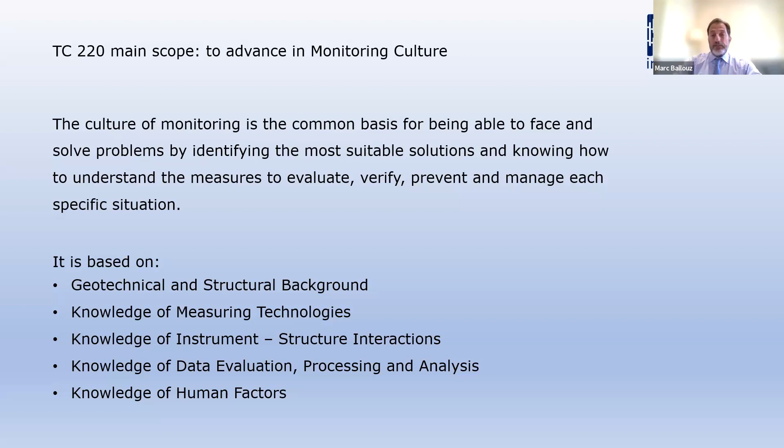That's the topic of our talk today. So let's see what monitoring is. This is a definition I found some years ago, and I think it's correct: it is the repeated observation in time of a process or phenomenon through the measurement of one or more indicators and the collection of information. What's important here is that they use the words observation, measurement, indicators, and information—not instrument and numbers and values. But I would like to propose something more: monitoring is the art of understanding the behavior of natural phenomena or man-made structures, and we'll see why I'm calling it an art.

What is the mission of monitoring? This is a definition I found and like very much, because it says the mission is to provide as much information as possible, in the simplest and most complete form, to be used by those who have to make decisions. This is the real scope, the real mission of monitoring—to support those who have to make decisions. This is clearly stated in the observational method, which is based on measurement and monitoring. But too many times we forget this, and we just provide instruments, numbers, and values, not information.

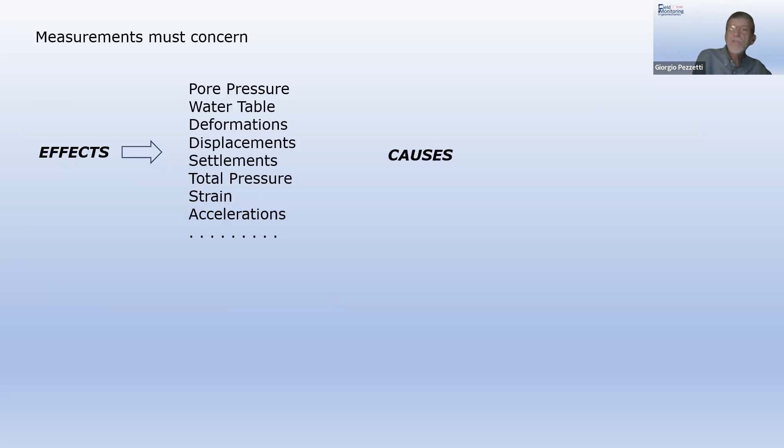What can measurement concern? Of course, the effect—what we are looking for. Some examples: pore pressure, water table, deformation, displacement, settlement, total pressure, strain, acceleration, whatever we want. We have enough instruments nowadays to measure almost all the parameters we need. But that's not enough—we have to go more in detail. I think it's necessary, even mandatory, to measure the causes that have produced the effect we are measuring. Otherwise, we lose part of the information. So we have to at least know or measure the loads, the pressure, the level, the flow, rain, wind—whatever has a consequence on the effect we are measuring.

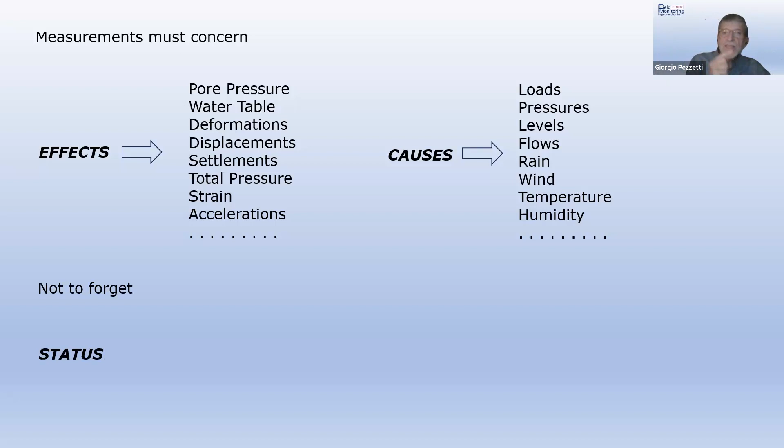But if we consider the definition of measurement, of course, we have not to forget to know the status of the system. Status means the working program, the progress of the work, which level had been reached during the construction, for example, which boundary condition: a cold season, a hot season, raining season, whatever it is. Correlated activities. Are they excavating? Are they building? Are they vibrating?

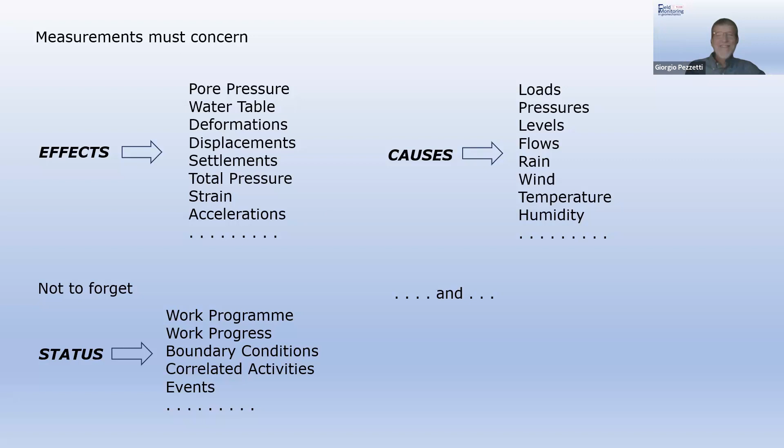I encourage everyone watching us to take a picture of this slide because it will save you from many problems. And of course, the observation is not enough to measure something by instrument, but we have also to visually observe what is happening. So we need to perform visual inspection, manual check, test, collect samples, making laboratory tests, everything that can be useful in order to complete the information that we are providing.

Giorgio, something. Tell me. Could you allow me to interrupt you for a minute?

Of course. Just to give an example of a construction site in Manhattan, New York, where during the excavation they had done the piles all around, secant piles, to do shoring for an excavation. And as soon as they started, the building next door started tilting. So because they had a good monitoring system, monitoring all the structure and infrastructure around, they detected this movement.

And they also had field reports, like what was happening, or as you have here, work program. And the client asked, what's happening? Why is the building tilting? And all the teams at the site, like geotechnical engineers, structural engineers, the contractors, started pointing fingers at each other. And nobody put together the work progress with the displacement measurements.

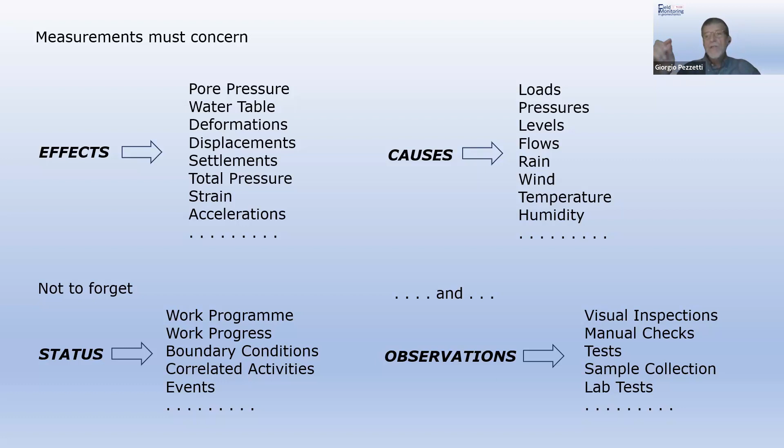That's experience, important. And it reminds me another point I will not touch in this presentation, that field monitoring is a teamwork. It's communication. The instrument expert is not enough. The engineer or the designer is not enough. But if they put together, they sit together around the table, they discuss the matter, a solution can be found. Yes. Okay.

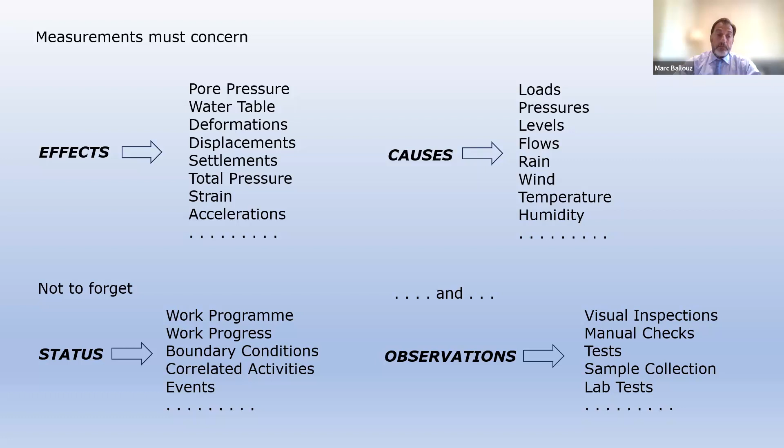Which are the basic rules of monitoring? Let me say that until a few years ago, there were no rules. In geotechnical activity, maybe geotechnical testing, site testing, or lab tests, we have a lot of standards, a lot of indications. We know exactly what to do, which instrument must be used, and how to interpret data. For monitoring, there were no rules. We started, I say we because I am part of the ISO group who is drafting this standard. In 2010, we started drafting this international standard regarding monitoring.

And this is part one, which is the general rules. And here you can find a lot of interesting suggestions. But look, since this is a standard, it's not just a suggestion. It's not something that you have to use, you have to apply. But anyway, let's consider it as a reference mainly. For example, regarding the instrumentation, they say that the key points in the monitoring program are the ones I've reported here: robustness, influencing factors, redundancy, stability, and function check and calibration.

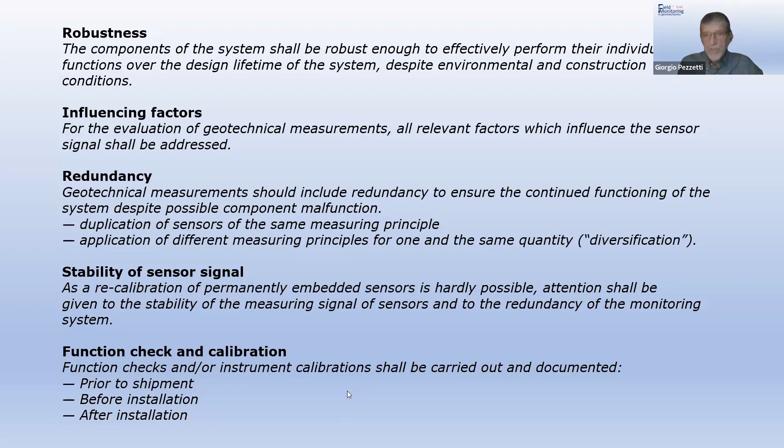First, this one. And I would add another point, very important, which is the conformance of an instrument. Conformance of the instrument means that an instrument, when installed, must not change the conditions. Otherwise, we don't know what we measure.

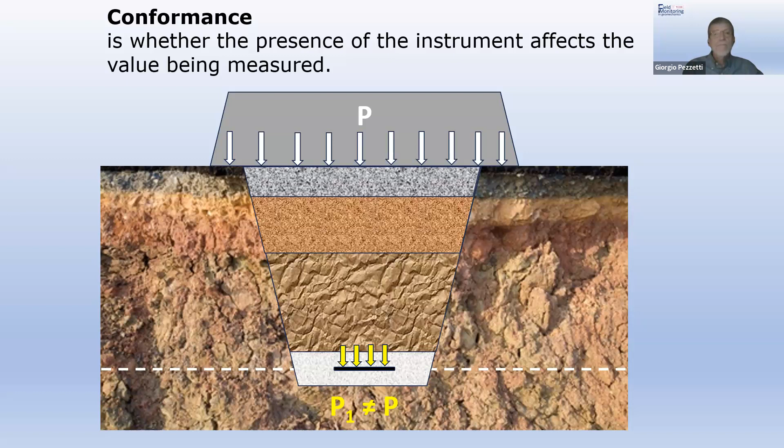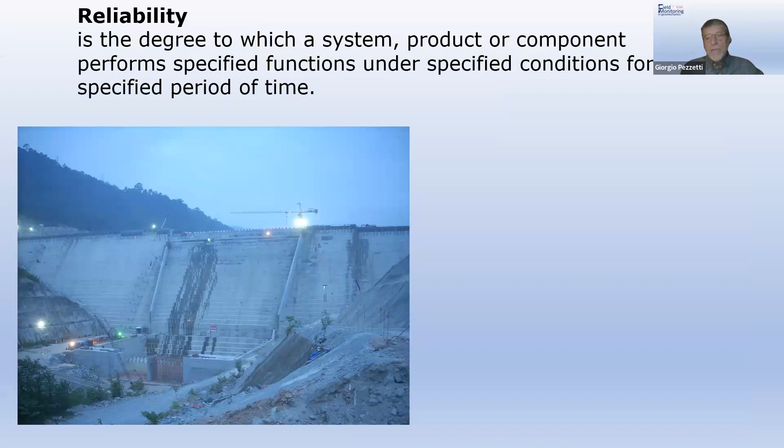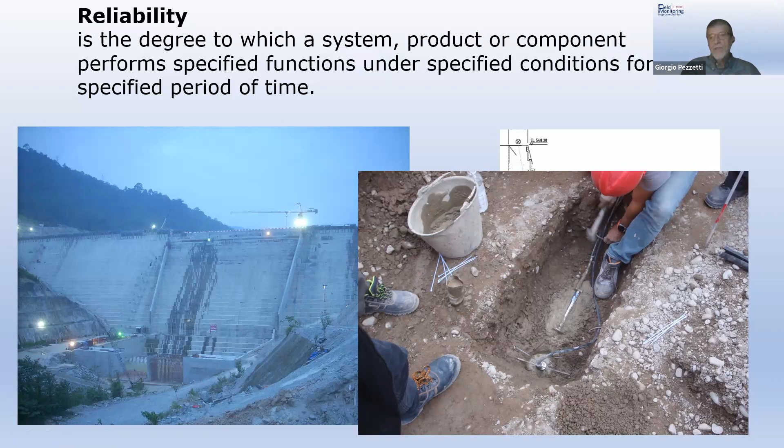And another one is the reliability. That means that the instrument has to work properly for the time that we expect, facing the conditions that are expected. For example, in a dam, if we have to measure something here at the bottom, and we install an instrument here in the foundation, what is important is that it is reliable. It survives the conditions for the lifetime of the dam, for example, which is 20, 40, 60, 100 years, without major change in its properties. So reliability and conformance.

But, and here I'm sure Marc will appreciate what I'm saying, there is another golden rule, which does not come from me, but from Ralph Peck. And he said that successful practice of engineering requires a high degree of engineering judgment. So we need, again, engineering judgment. We have rules, we have standards, we have references, but the main point is the engineering judgment. We have to know what we want to measure. We have to know the basic problem, the basic constraint.

And we have to understand that we are measuring maybe in a small point, but the structure or the area is so large that we have to consider even a broader range. So Peck says that we have to know what is happening in the narrowest technical details and the broadest concept planning, in order to be sure that each step is sound.

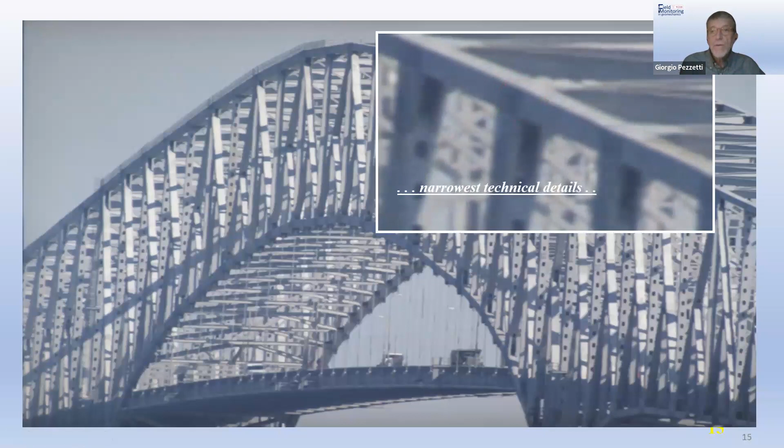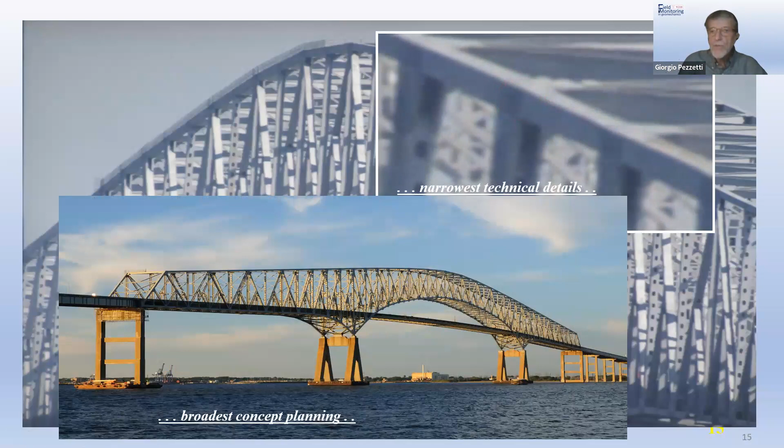A small example, if we have a bridge like this, and we have to monitor, we can monitor a single node, and it could be important, and we have hundreds or thousands of nodes, but we have to not lose the behavior of the whole structure. And nowadays, we have the instruments to do that. We have the instruments to measure the small detail and the entire structure, maybe using satellite or whatever it is. So this is another point that we always have to remember.

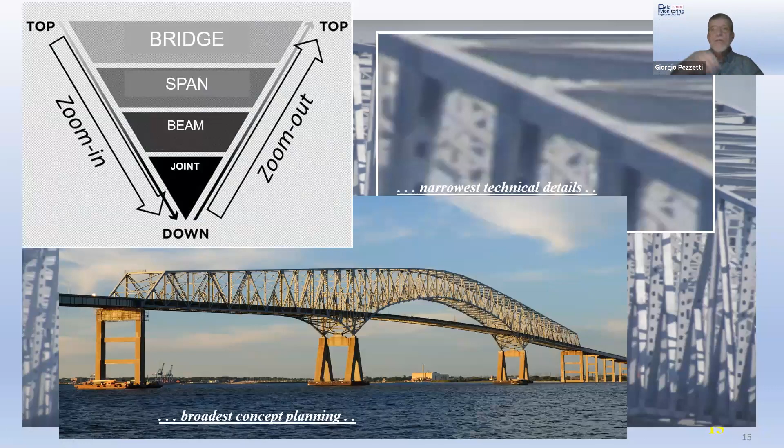And I found very interesting this graph. I borrowed it from an Italian professor, Professor Cascini. I call it zoom in and zoom out. So we have to consider the entire structure and then go into detail and then back to the structure to see the interaction between detail and the whole structure.

But I said it is an art. Why is it an art? Because if we consider that there are no specific rules, no, I would say, academic references, what is called the human factor is playing a great role. Human factor can be related to engineering judgment, but it's something more. And human factor, to me, is what makes the difference between a monitoring system and a monitoring solution. At the beginning, I mentioned solution. That's why. Here we have a couple of sentences from Elmo DiBiagio and John Dunnicliff referring to this.

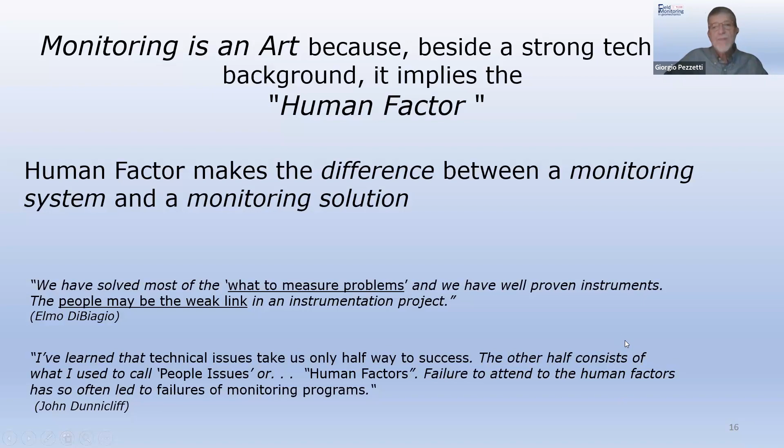If you want, you can read it, but what is the difference between a system and a solution? A system is something that starts from A and goes to B, following a straight line, a sequence of points, always the same and predefined. A solution is something which goes from A to B, but through a number of questions, a number of points where we have to consider different options, and in case we go back. And this is the difference. Too many times we see that what is used is a system, not a solution. And that's a very interesting point.

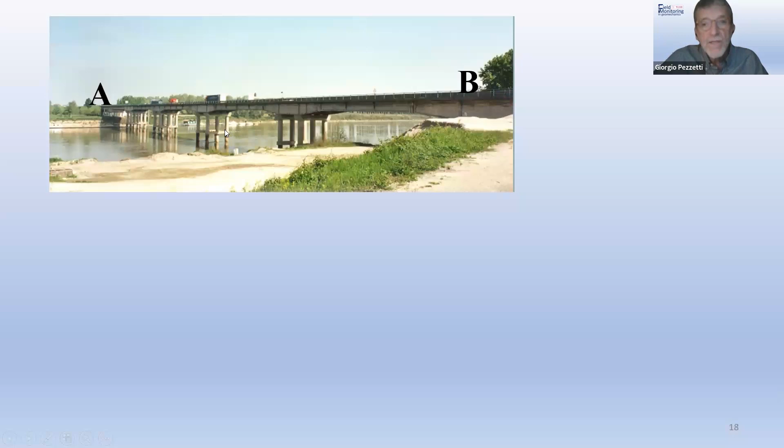Here, even here, a very simple example, if it works. Imagine you have a river, and you have to cross the river with a bridge to connect point A to point B. We can build this type of bridge. It enables cars to cross the river, and it perfectly works. But it has, for example, piers inside the stream, inside the river. But we can even build something like this. So what's the difference between these two?

The difference, from a technical point of view, is that, for example, here we don't have any pier inside the river. That means that in case of flood, it is much better, much more reliable. And many other things, but even from the point of view of the layout, it is something much better.

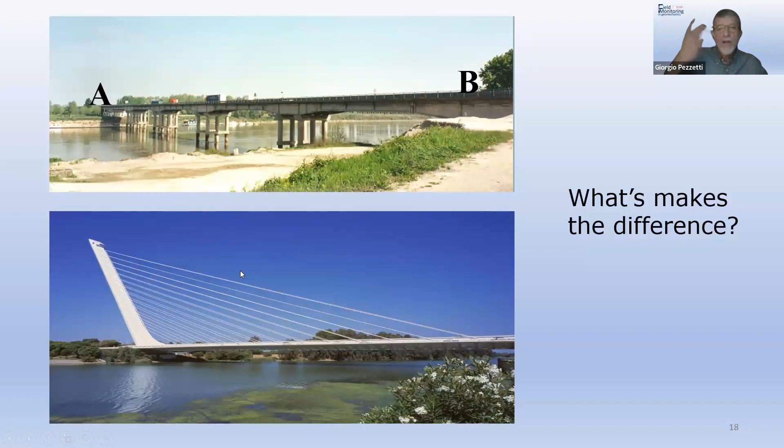So this is the difference between providing a solution, we have connected A to B, and providing a system which connects A to B and provides a solution, which is something which implies more than just the connection of the 2 points. And again, as Albert Einstein said, logic and technology will get you from A to B, in our case, but imagination will take you everywhere. This is what we have to consider.

But we have also to consider another point, that we are working in the real world. And the real world means that we don't have to strive for perfection. Everything we are doing is affected by error. So we don't have to strive for perfection, but accept that uncertainties and error can be embedded in the measurements. We don't have to neglect it, but we have to learn and live with the fact.

So again, I mentioned the accuracy. Accuracy is not the most important point. Errors are always present. We have to know that they are there, we have to consider them, we have to live with them and learn from them. And as Benjamin Franklin used to say, don't fear mistakes. You will know failure. Continue to reach out.

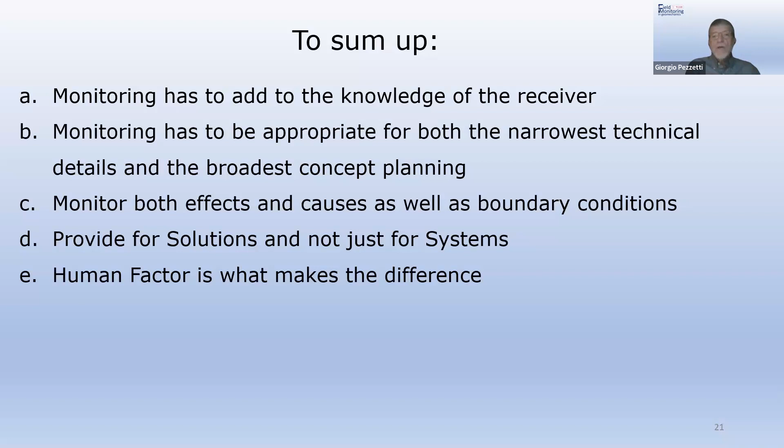So just to conclude, I will say that monitoring has to add to the knowledge of the receiver. Otherwise, it's useless. Monitoring has to be appropriate for both the narrowest technical details and the broadest concept planning. So we have to look at the detail, but even at the large scale. Monitor both effects and causes, as we've seen, as well as boundary conditions and, if you want, status. Provide for solutions and not just for systems. And the human factor is what makes the difference.

Even if, as Andrew Ridley says, more often than not, the correct monitoring solution costs more, of course. And being prepared to pay more for a better product is another human factor. So you have to have a client or a counterpart which is prepared to pay more for having something more.

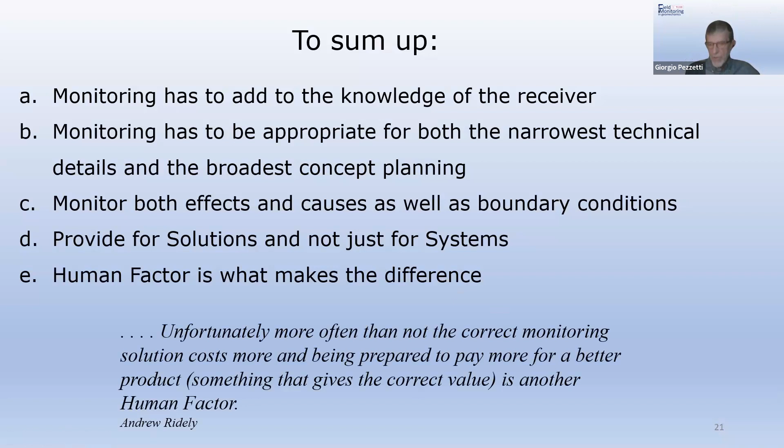And by this, I conclude, and I would like to dedicate this to these two pillars of our community, Elmo DiBiagio and John Dunnicliffe. I had the privilege of knowing them and working with them, and I have learned a lot from them. And what I have presented is something that directly comes from their minds.

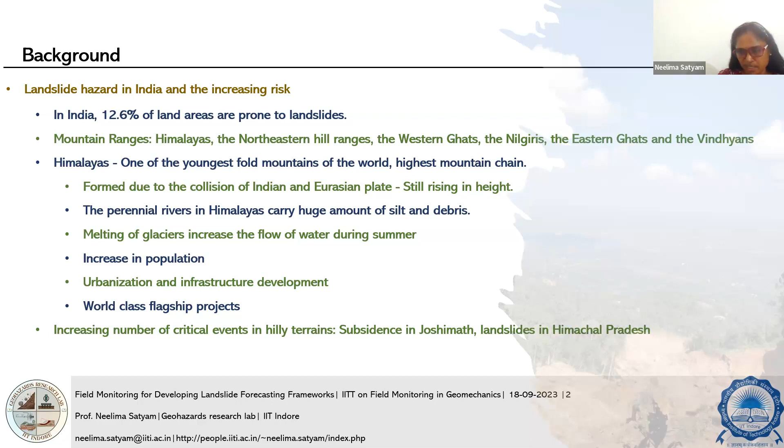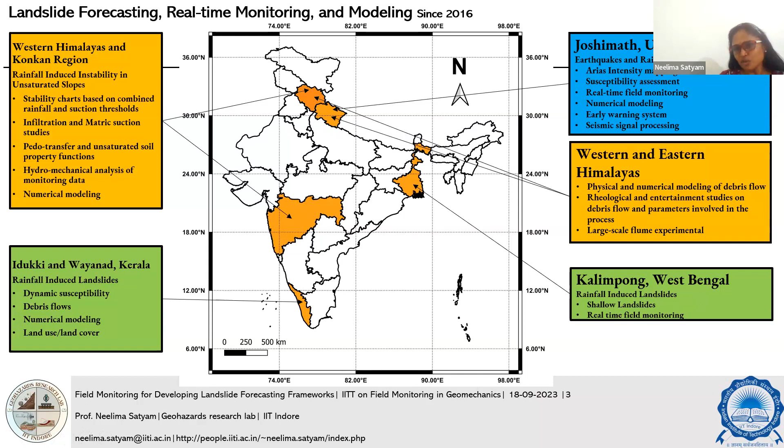So this is broadly what I'm doing since 2016. These are my study regions where I'm working. Today I'll be picking up two interesting case studies. One is Joshimath, Uttarakhand, which is in the Himalayan region, where we have done the combined hazard, and we had an extensive monitoring system on a real active landslide. And the other region I'll be taking is Kalimpong. This is my first study region, which got funding from the Department of Science and Technology, Government of India. This is the first time, in 2016, when I started landslide monitoring. It is basically rainfall-induced landslides. So both the case studies have different methodologies and approaches.

So I'll briefly take you to the first case study, which is Kalimpong. We have done this at a local scale, because our goal for monitoring is not to develop the early warning system. Our goal for monitoring is to validate our threshold models so that we can reduce our false alarms. Because monitoring a larger area is very expensive, and there are so many challenges like safety, communication, network that we face in the real field. So we have done this monitoring at a local scale, and then extrapolated this to develop the warning system at the regional scale. So this is the first project in landslide forecasting, and as I said, it is supported.

And the adopted methodology you see here included only the temporal aspects of the forecasting, because the study area is at the local scale, and it has three aspects. One is the definition of the rainfall thresholds, then installation of the field monitoring system, and the integration of these two to develop the landslide forecasting system. Then we collected the data in phases, starting with collecting rainfall data. When we started at this site, we got rain gauge data giving us daily rainfall, but we were looking for at least hourly data to develop our operational warning system.

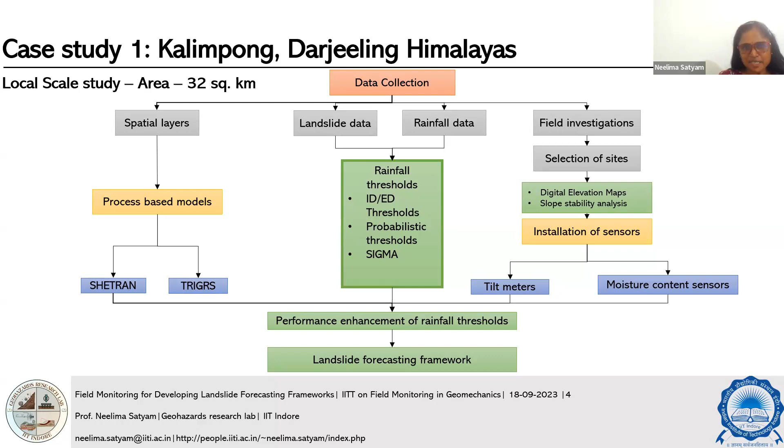I'll just take you to the details of the study region. So this is the location. It's a very beautiful area and a very touristic place. The town is like a curved tabletop. You can see the urbanization here; a lot of structures are built up, people are building hotels of 5-story structures.

Because of that, they are blocking the streams, or what they locally call jhoras. The streams are getting energy, and a lot of erosion is happening when they are going down. So on this table, as I said, it's like a tabletop. On either side, we have two rivers flowing like this: the Tista and the river Relli, which are very, very big rivers.

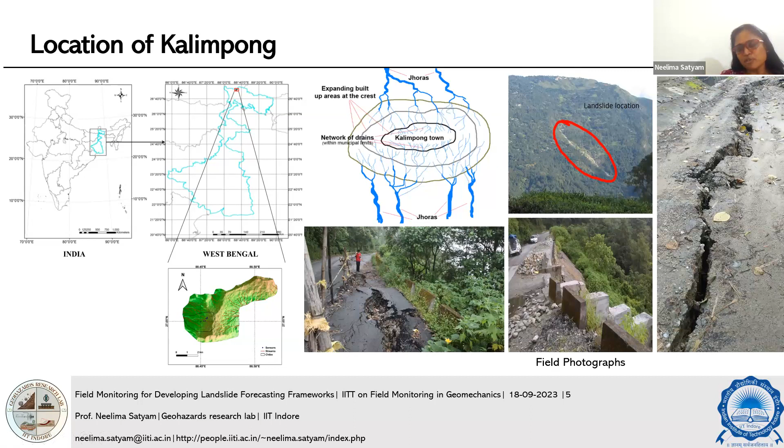And you can see here, this is the area where we chose to do the monitoring. To choose this area, we have done a lot of field investigations and other things. This is the only road that connects this particular town to the rest of the country. And this has a subsidence kind of failure. It's not a sudden failure that we observe in this region; it's a very progressive sort of failure. So, to start our work, in the first step...

What is the slope angle of this mountain? Yes, it's around 45 to 55 degrees. Wow. And what kind of soil is there? I'm guessing it's a conglomeration of cemented rock. Yeah, the geological formation is basically phyllites. And if you talk about the geotechnical base, mostly sand predominant, with some little percentage of clay also.

And was monitoring installed after the failure? And what kind of instruments were installed? Yes. So the failure was in the western part; we instrumented that. As I said, in that particular region there are shallow landslides. I'll show you some photographs of the instrumented sites. What we did is put tilt sensors at 2 meters from the surface, because they are shallow, and we did slope stability analysis to understand the depth of the slip circle, and then tilt meters were instrumented to understand the ground tilt, so that we can integrate that with the rainfall parameters.

So you were monitoring tilt with tilt meters and the water content with piezometers, or what kind? Yeah, volumetric water content sensor. Okay. Shall I keep going? Sure. So, as I said, we started with the threshold modeling.

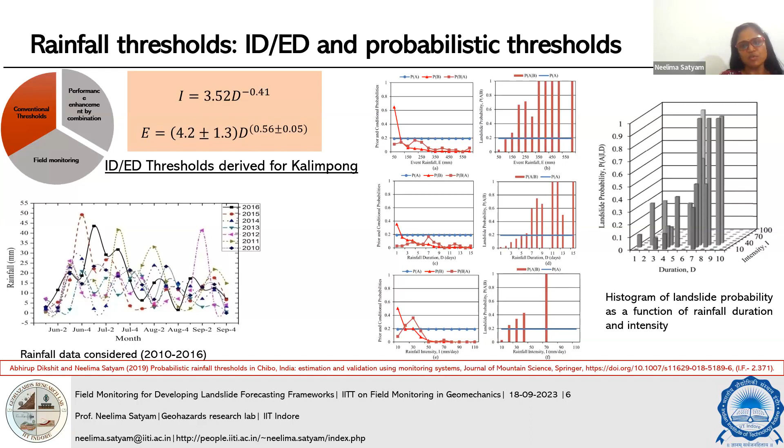In our first step, we derived rainfall thresholds for the study region, starting from the ID and ED thresholds, and later ED thresholds, and also an algorithm-based approach called CTRL-T, which we used for better efficiency. Both these thresholds consider the historical relation between rainfall and landslides in the database. We had a landslide inventory database, and a threshold equation of 5% exceedance probability was derived using a frequentist approach also. One-dimensional and two-dimensional Bayes theorem was applied to do the probabilistic thresholds.

And then we also applied the SIGMA model, which gave us efficiency. An attempt was made to use this model, which is used extensively in Italy for landslide forecasting, in an entirely different setting. Since I know the collaborator, we took the code, modified it, and integrated it with our real-time monitoring data. SIGMA considers the standard deviation values of the rainfall trend, both short-term and long-term, and issues warnings based on different threshold levels. This algorithm was customized for this particular study area of Kalimpong.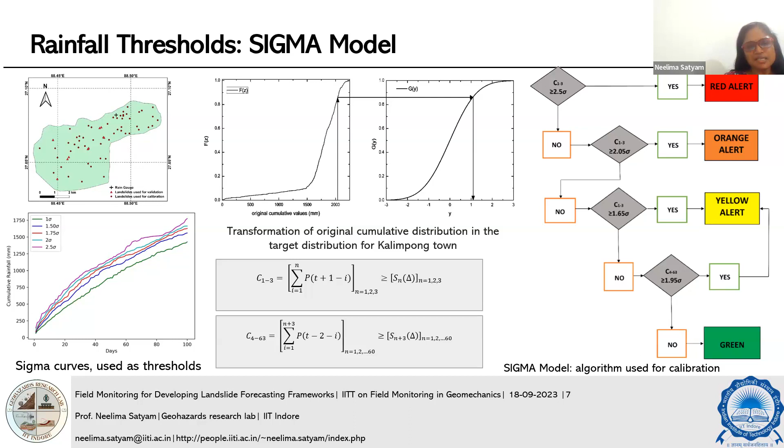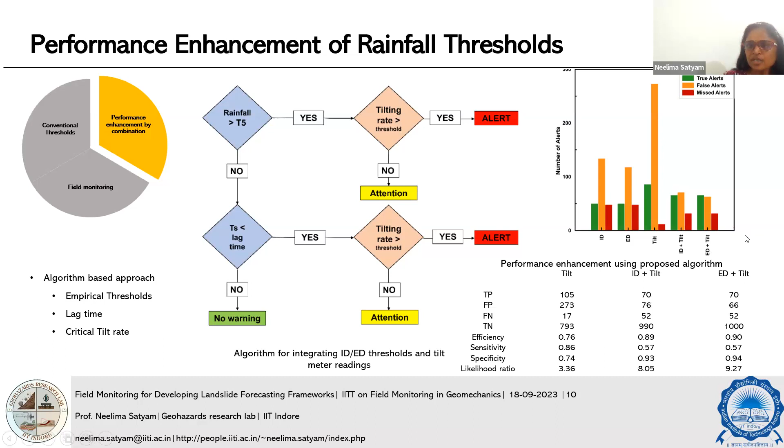Further, the sigma algorithm was also modified to incorporate these tilt rates that we observed. Sigma itself was performing well for this particular study region, Kalimpong, with very few false alarms. The integration with the tilt rate further improved the performance. So we got almost an efficiency of 0.94, as you see here, with a likelihood ratio of 20.23. This method we found to be better among all the rainfall forecasting models that we explored for Kalimpong. Because of time constraints I didn't put it up, but we explored almost 8 different forecasting models on the same study region, which is again novel for this particular study.

So 4 levels of warnings were designed for this study region in line with the existing warning system we had in the country, with color codes like red, orange, yellow, green.

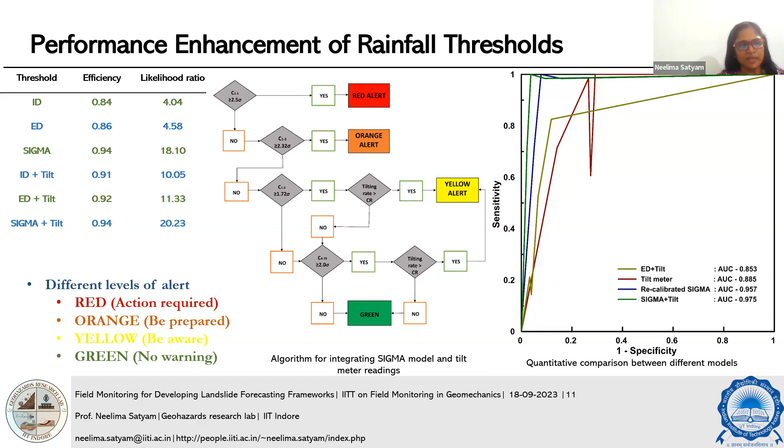So my second study region is a bit more complicated because it is not only rainfall induced, it has seismic causes also, because this is very near to seismic regions in the Himalayas, and also the area is larger. What we have done - we are working on a two-stage landslide early warning system here, in which at regional scale the system will combine seismically induced and machine learning based susceptibility maps with the rainfall thresholds, so as to give the real-time warning in susceptible regions.

Joshimath is a hotspot now. It's all over the news because 5,000 people have been asked to evacuate this year, but we started this instrumentation last year. At the local scale, various thresholds will be defined from the data obtained from different sensors, and warnings will be issued based on surpassing these thresholds.

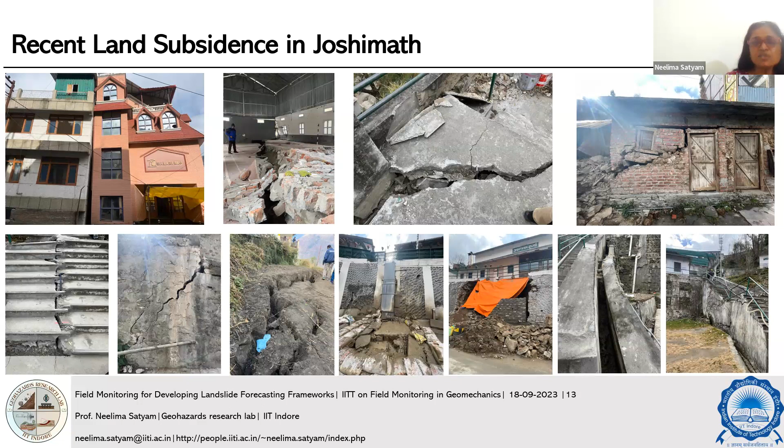So this is a recent land subsidence that we observed in Joshimath. As I said, almost 5,000 people have been asked to evacuate. It's a big challenge even for the government to handle such a scale.

So this is actually how we started. The probabilistic seismic hazard assessment for the entire Uttarakhand state was performed to map the areas highly affected by seismic hazard. Let me tell you the important challenge I felt in the last couple of years in monitoring - where to start monitoring, because in the entire state I had to find out the most vulnerable slope to put my instruments in that region. That was more difficult for me.

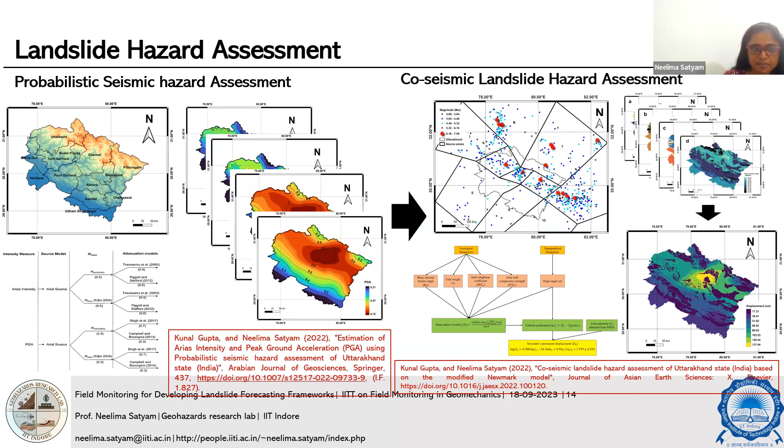Anyway, we had a framework - a comprehensive earthquake catalog was prepared, and then it was declustered, harmonized, and completeness of data was ensured. Then the study area was divided into 10 discrete seismogenic areas. For each zone, seismic parameters were evaluated using this catalog and the tectonic framework. 80% of this entire Uttarakhand state is covered by the Himalayan mountain ranges. So we applied a modified Newmark's model, which incorporates the rock joint properties, and employed it in the analysis. We found that this particular region of the Chamoli district, that is Joshimath, was highly susceptible to co-seismic landslide hazard.

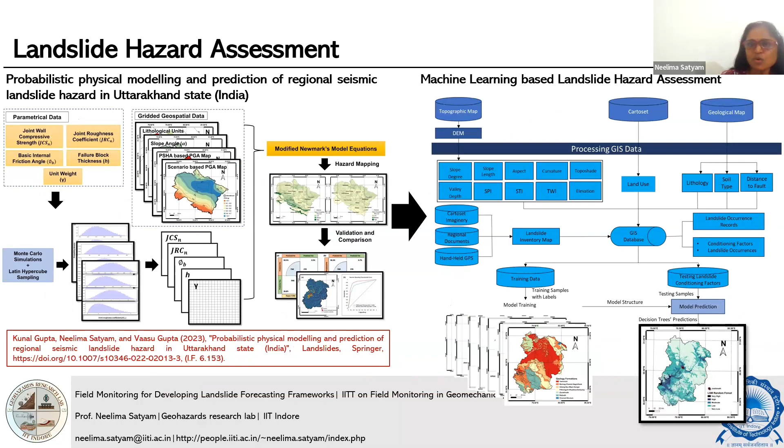So this is the framework for physical modeling to predict the regional scale landslide hazard for the entire state. We also applied machine learning models for developing landslide susceptibility maps so that we can choose the region.

So from both seismic hazard assessment and rainfall distribution, as I said, this is a multi-hazard problem, and it was identified that this particular region is critically affected by landslides. Based on these observations, we selected a site, a place called Lambagad, and this is the road which I said is a pilgrimage road. This site is a mixed slope with both soil and rock.

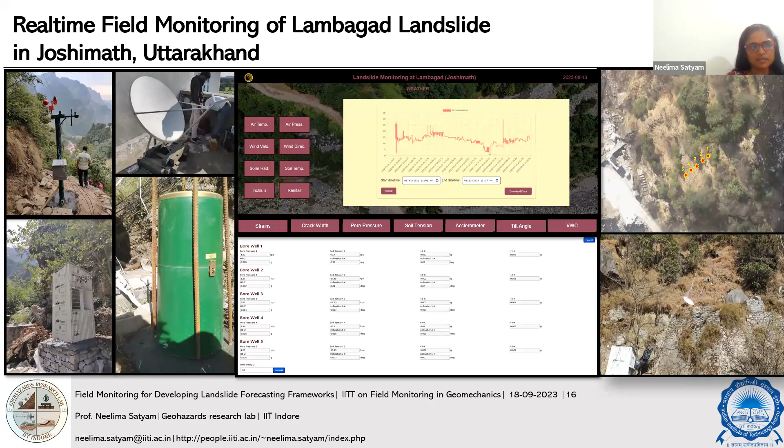Tilt meters, accelerometers, tensiometers, and piezometers were installed in the borehole at different locations. Cracks in the rocks are monitored using strain gauges and extensometers, and an automatic weather station is also installed at the location. All the sensors transfer data every 10 minutes through VSAT, and the locations of sensors are marked, which you can see on the figure.

At all 5 locations, we installed rock joint extensometers and strain gauges to monitor the extension and strains in the rock cracks. We can also observe an increase in crack width and strain with increase in temperature. However, no significant correlation was found between rainfall and crack width in this particular study region.

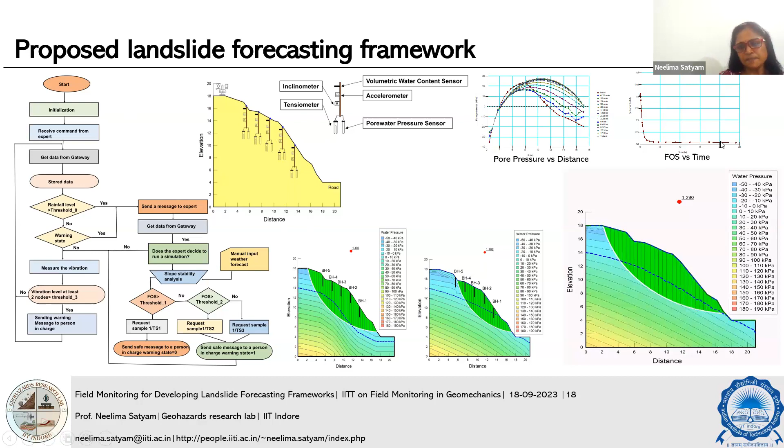So let me conclude. We are trying to develop landslide early warning by real-time monitoring, both at local and regional scales. Let me tell you, monitoring is a site-specific activity. Based on my experience, it needs a lot of inputs from geological, geohydrological, geotechnical, and geophysical studies. Field tests have to be carried out, along with a lot of slope stability analysis and lab tests for collection of samples. Only after that can we try to do the monitoring.

So when we started, at some locations we didn't get much data from sensors, so we were very unhappy, and safety was a major constraint because of attack by animals or by some people, among other things. An effective, efficient and reliable communication system is another challenge.

A multi-sensor based system can provide information on various field parameters, which we are presently doing in Joshimath. Inclination and variation in moisture are very critical in evaluating slope stability, and vibration information can provide insights on reasons for failure. We have also started microseismic monitoring in Joshimath now, though I didn't put that data here.

And use of field monitoring for landslide forecasting. For larger areas, forecasting is one of the very great tools, but it has some false alarms. So when you are developing a warning system, it's basically trust, so we need to minimize false alarms to almost zero. Monitoring plays a crucial role when we integrate this with forecasting, then we can build very efficient, effective operational warning systems for landslides. Real-time field monitoring should be integrated with rainfall thresholds and slope stability analysis so that proper forecasting and warning system is possible. Thank you so much.

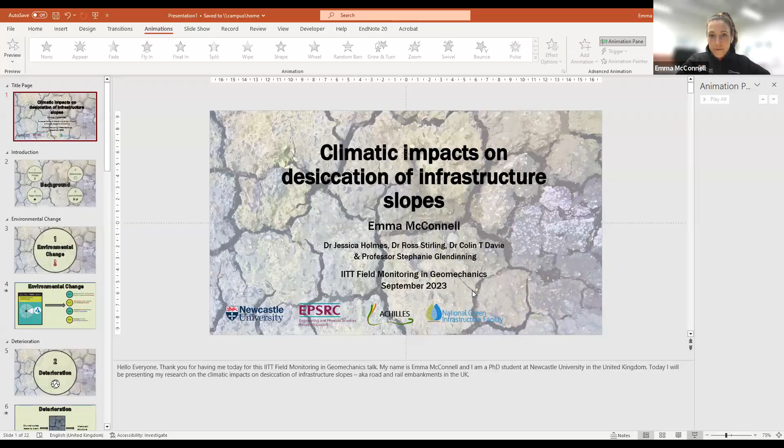Field monitoring in geomechanics has always been an interest of mine. I used to do site investigation, so I understand the importance of using field data and interpreting it properly. Today I'm going to be presenting some of my research from my PhD project on climate impacts on the desiccation of infrastructure slopes. I'm just going to start off with some background to help frame the problem of desiccation on infrastructure slopes and how this fed into the development of this research project.

Starting with environmental change, looking at the UK climate projections for the future, the report says by the end of the 21st century all the UK is projected to be warmer. We've got hot summers going to be more common with increased hot spells. We're going to have increased intensity of heavy summer precipitation and increased hourly precipitation extremes.

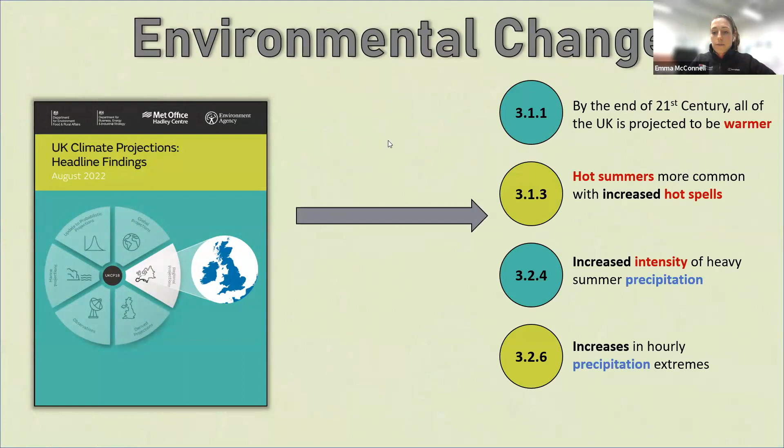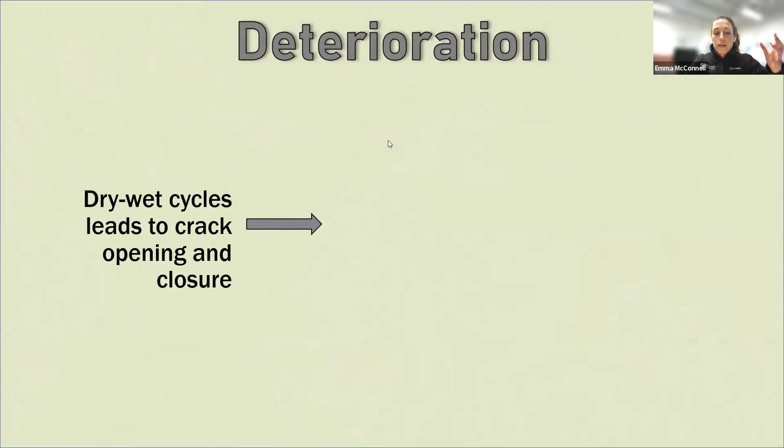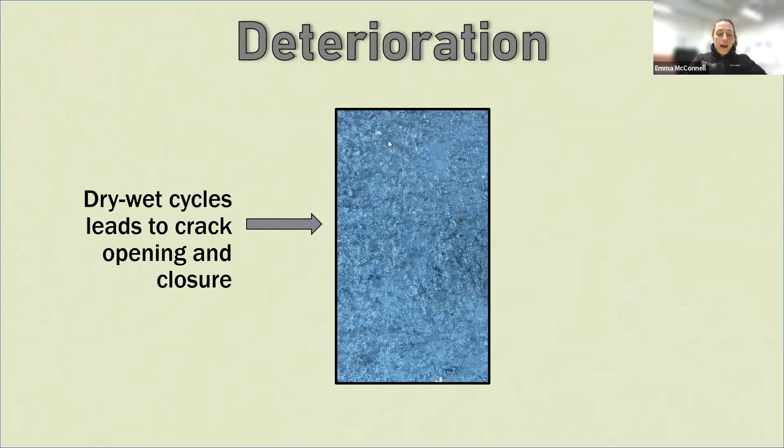So why is this important in terms of desiccation cracking? Well, because this sort of weather pattern is going to drive the deterioration of our infrastructure slopes. That is because the drying and wetting between hot and wet cycles of weather leads to crack opening and closure on our infrastructure slopes, as you can see in this little animation here. If we're going to have longer summer hot spells, desiccation cracking is going to be more intense on our slopes and last for a longer period of time, which increases the time of vulnerability our slopes have to further instability. The opening and closure of cracks alters the soil structure through time.

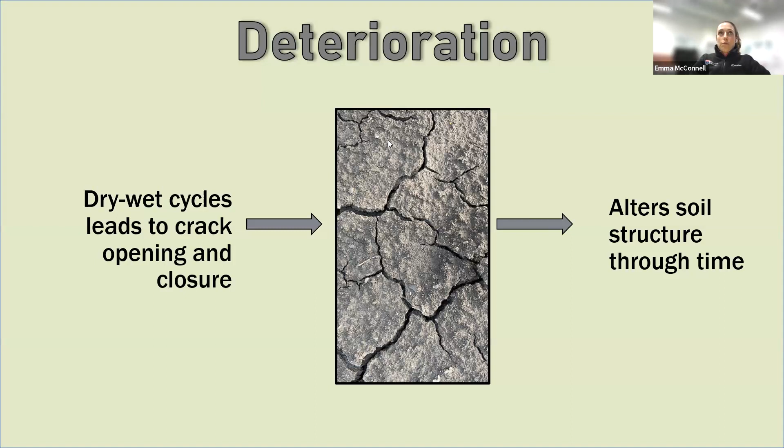This is a problem because we're altering the soil structure, but also when we combine this with what we call trigger events, that's when the real problem starts to establish. What I mean by trigger events is these heavy storms occurring during the summer months. If we combine cracking and open crack structure with a very intense heavy rainfall event, what we get is preferential flow through the cracks, which increases water content faster and deeper within the soil profile, causing loss of the stabilising suction that many of our slopes and assets rely on, especially those made of clay.

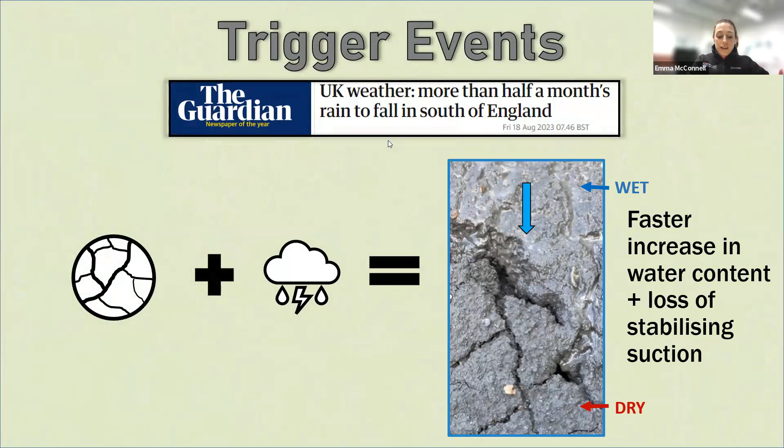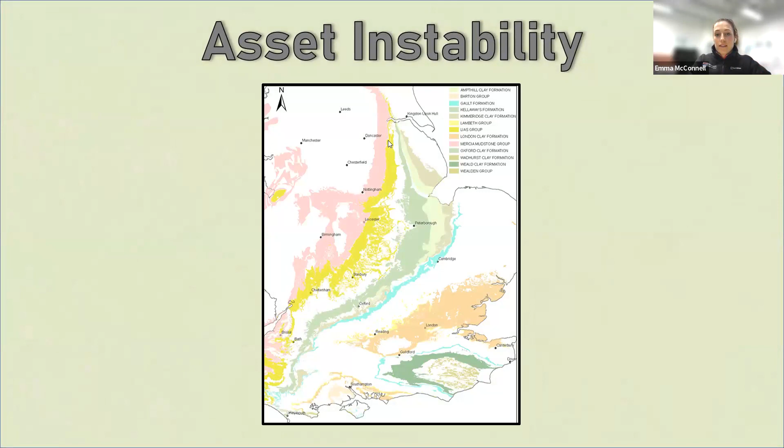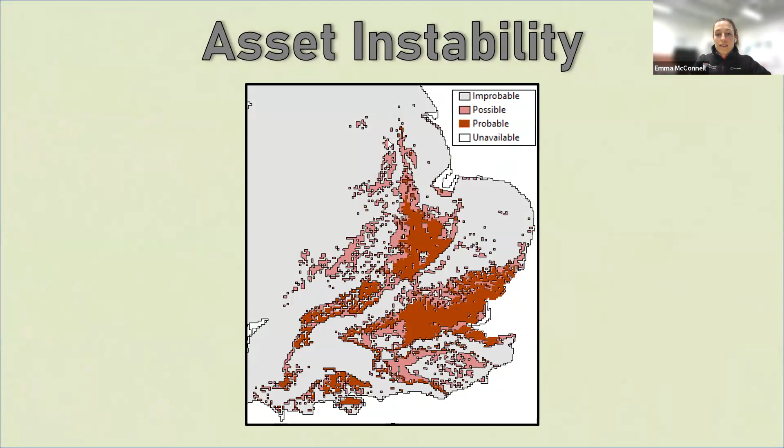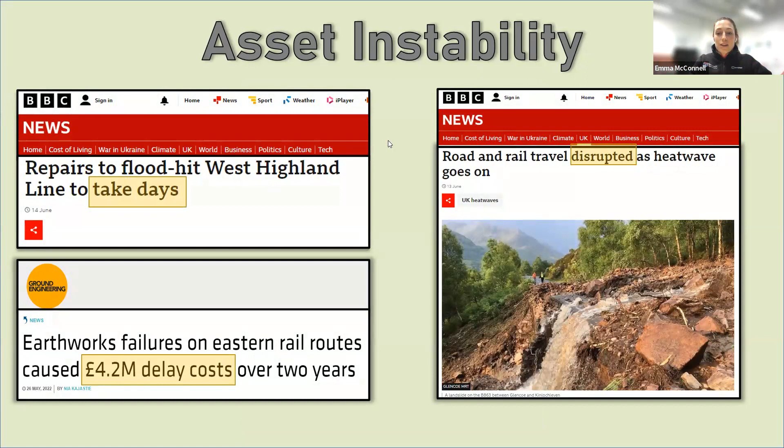And this is just showing how these processes are already taking place. These are some recent news articles over the past couple of years where we have had these hot summers with drought conditions on top of heavy rainfall events, and we have lots of time constraints and pressure being put on our assets because of failure during these periods of weather.

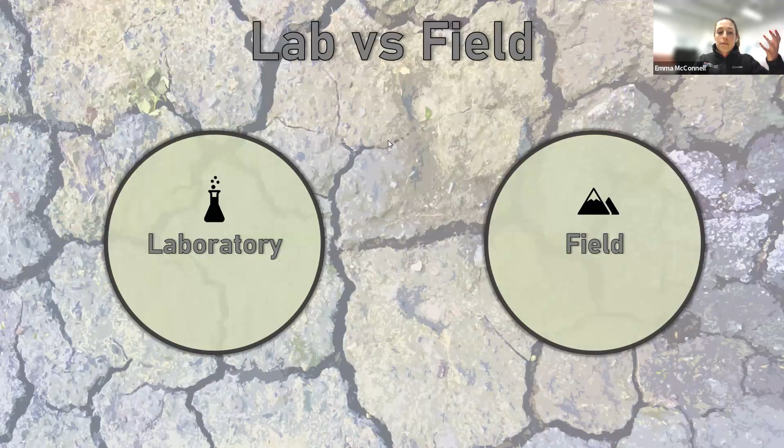So when we were designing this research project, we had to really consider lab versus field monitoring. In terms of laboratory monitoring, there are pros and cons. Some of the pros are that it allows detailed monitoring. You can isolate certain parameters and find out their contributions to desiccation cracking, and you can investigate a lot in a short period of time.

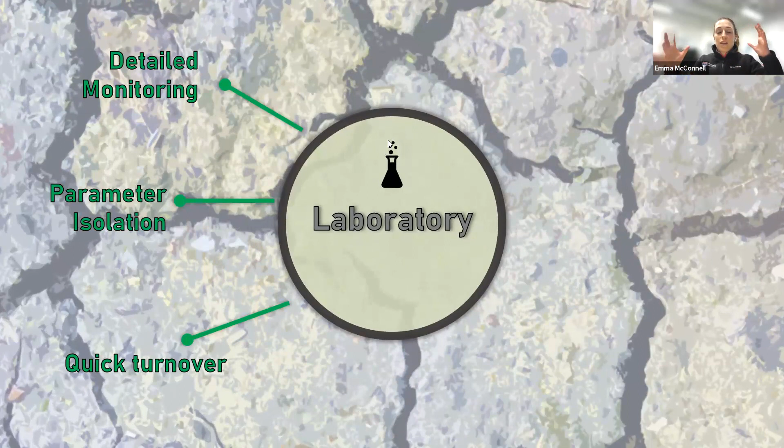But in terms of looking at the scale of assets, it has a lot of drawbacks, which is that desiccation cracking is very much controlled by what you monitor it in. So that's the scale of your setup, the type of container you use, the type of environmental conditions you put in the lab, and this all leads to quite unrealistic wetting and drying gradients compared to what you would see in a large scale slope in the real world. So overall, the lab experiments are quite incomparable to the scale of real world assets.

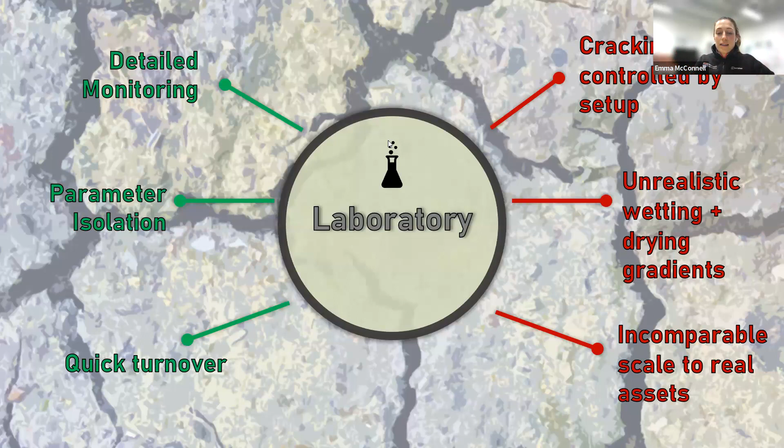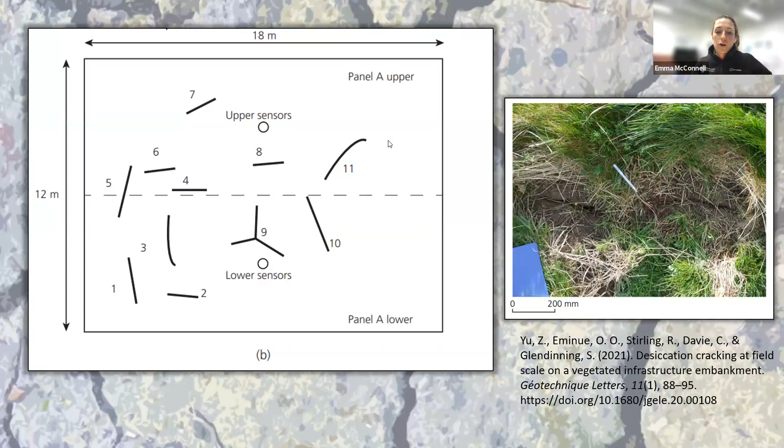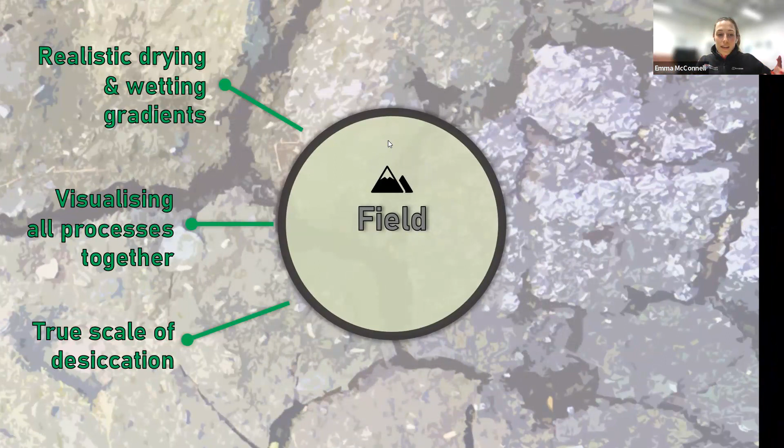So that brings us to the field aspects of this, which again has its pros and cons, but the pros are more beneficial to this research project: you can model realistic drying and wetting gradients on an actual asset because it is performing as it should. It visualizes all the processes together, so you're not isolating one or the other. You can see how it all joins together in the field by monitoring, and it is the true scale of desiccation cracking, so it's really what these processes are going to show.

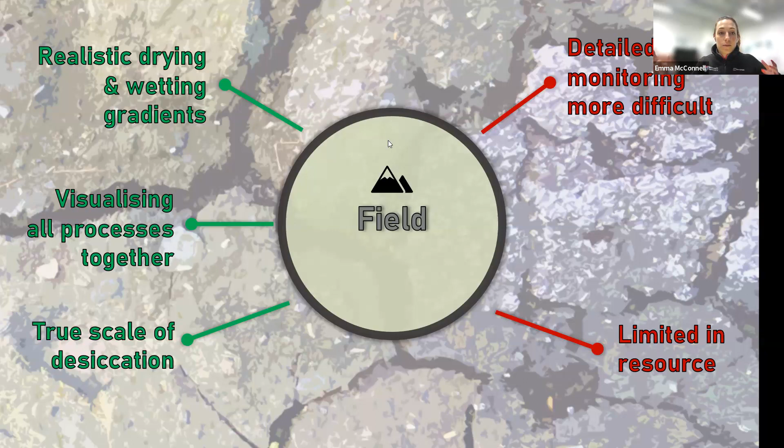But again, detailed monitoring is more difficult, and we don't have a lot of these real size assets to be able to monitor. They're not readily available to us unless we construct them ourselves, but that is difficult to do as well.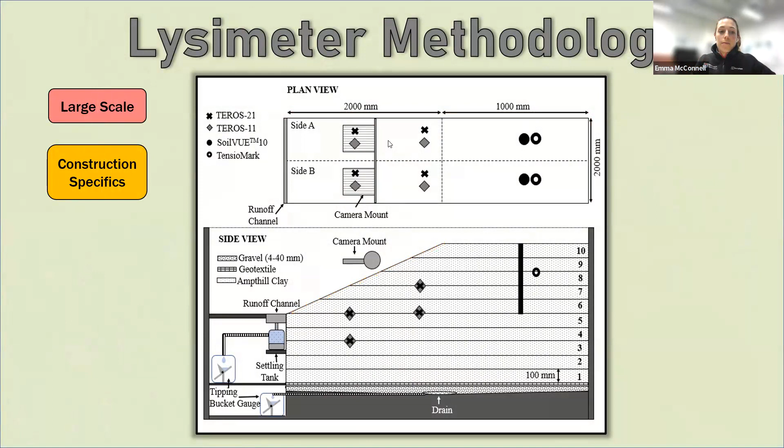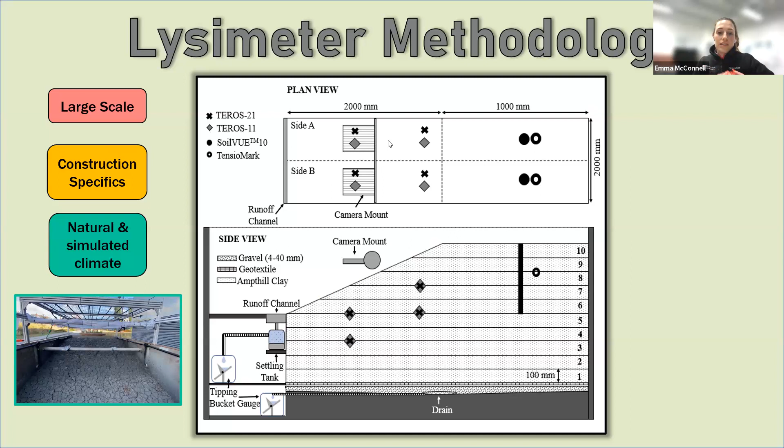So from this, we decided to go for an intermediate scale methodology, and this is where this lysimeter comes into play. It's a large scale experiment, 3 by 2 meters by 1 meter depth. It's got a slope embedded in it, so we can model runoff and water balance within the slope. It's been exposed to both natural and simulated climates, so as well as having a rainfall simulator installed on it, it is located outdoors, as you can see here, so it's exposed to natural deterioration with actual wind, temperature, solar radiation, all these aspects applied to the slope.

We have detailed monitoring, so we have suction and water content sensors throughout the slope profile. We have a runoff channel and drains with tipping buckets to measure runoff and flow through the soil. And we also have a camera mount to monitor that surface desiccation through time.

So if we combine this detailed monitoring with long-term monitoring, as this experiment has been going on for over 2 years now, this will really help capture the deterioration we're interested in within the slope, both through the co-location of suction and water content sensors at the same depth to form in situ soil water retention profiles and see how these change through different months and drying periods, and through the camera mount to see how the surface desiccation of the soil changes through time.

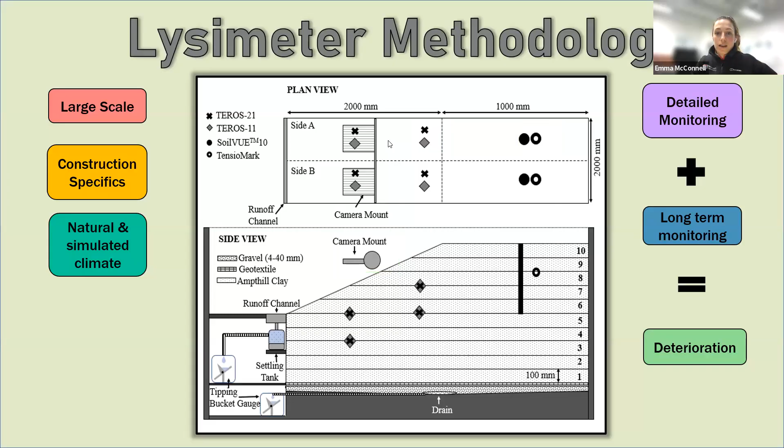So I'm going to show you a snapshot of the results here, and what I really want to point out is how we're bringing all these different aspects of this field monitoring together to really paint a picture of what's going on in the slope and really understand how desiccation cracking interacts with the climate, and then how in turn that affects how water moves through the soil and affects subsequent cracking and deterioration of the soil.

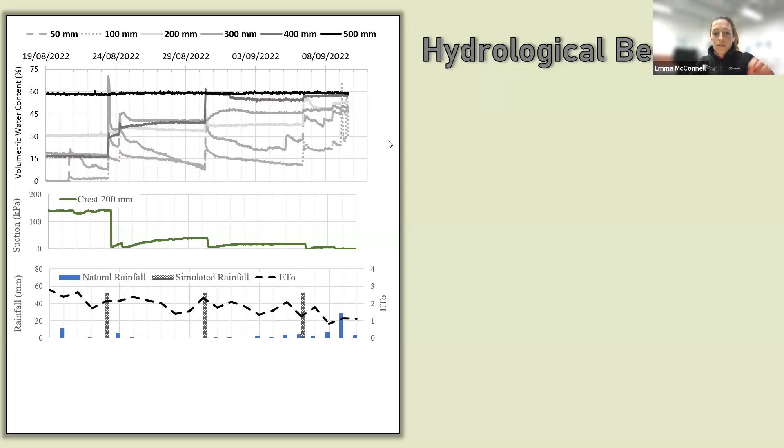So this is a 3-week monitoring period here, where we have water content in the soil, suction through the profile, the natural and the simulated storms, which were about 52 millimeters of rainfall we applied in 1 hour to the slope. So the background rainfall is blue, and the simulated storms are the patterns, the kind of high rainfall we applied, as well as runoff and the crack intensity factor recorded during this period. So I just want to point out that we have the natural rainfall event of significant magnitude in the yellow, and then the 3 simulated storms are highlighted by the blue.

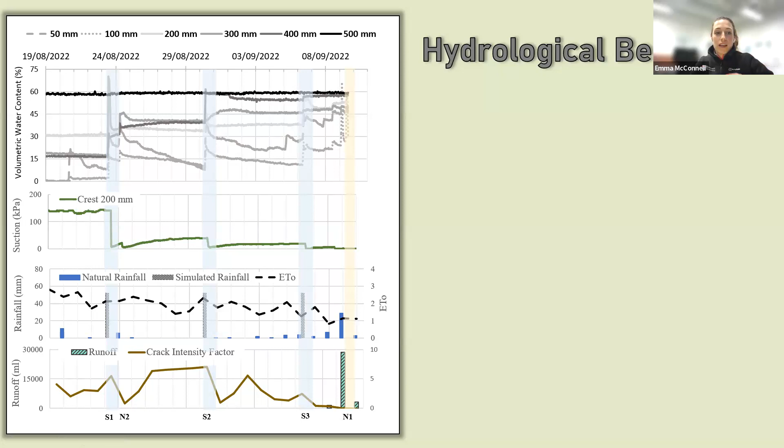So the first thing I want to show is how our soil profile is getting wetter as we move through time, and this is matched by a drop in suction, so what we expect for these kind of conditions. And if we then take a look at what the cracking is doing and relate that to what is going on in the soil profile, we can see some quite interesting things, where we start off with really dry conditions. There's not much rainfall, we've got high evapotranspiration, we've got high suction, and as a result, the water content profile is quite low.

But after we apply that first simulation, we can see that the cracks start to close. They don't close entirely, but it's matched by an increase in water content and a drop in suction. Between the application of simulation storm 1 and 2, our crack pattern managed to regenerate itself. Even though we've got higher water contents and lower suctions in the soil, it has basically returned to what it was pre the first storm. After the application of the second storm, again, we get crack closure a wee bit more than the last time. Again, it's matched by this rapid increase in water content, drop in suction back to 0.

Between simulation storm 2 and simulation storm 3, our crack pattern doesn't get as much time to regenerate because we don't have the drying conditions as we did before, and we had a lot of small scale rainfall, so it stays quite open but with a very fine network, and some of the larger cracks opened. And then after the application of the last simulation, they actually still remained open, and it's not until this natural storm after the 3 simulations that the cracks eventually closed.

So this shows the duration of time in which cracks can be open: we've still got high water content in the soil, we're still getting cracking; we've got low suctions, we're still getting cracking. And it's this idea that the cracking can appear even when conditions in the soil aren't very, very dry, which extends that period of risk for your slopes. The other thing I'd like to draw your attention to is we can actually see the response shallowing in the sensors as the slope becomes wetter, which shows these cracks closing from the bottom, and this idea of preferential flow in action in our slope captured quite well.

So one other thing I said is we can help see the degradation of the soil through time through our developing in situ soil water retention curves. So this is the drying curve from the summer of 2022, and we compare that with the drying curve of 2021. So we can see we have a shift in the soil air entry value, we've got an increase in the saturated water content, and we have a steepening of the desaturation gradient.

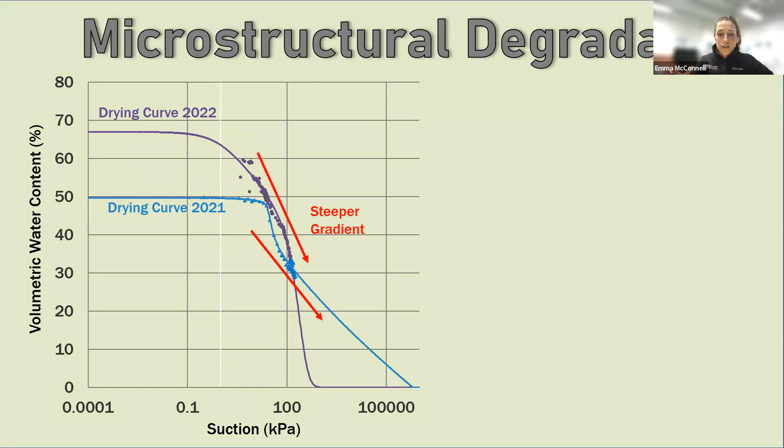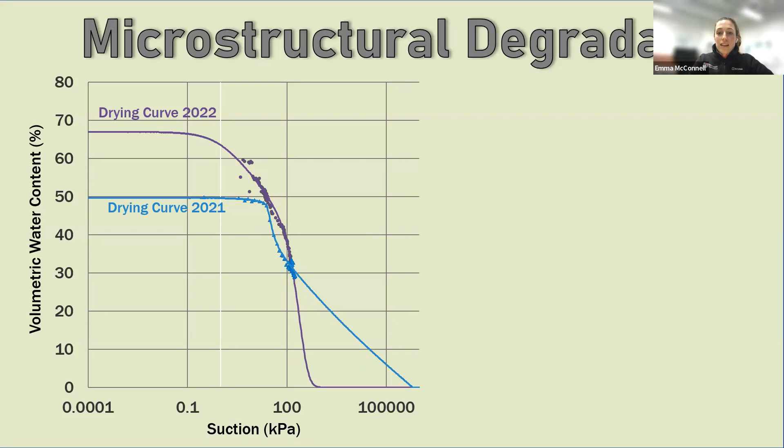And this kind of points towards development of a larger, more open connected pore structure, indicating this deterioration of the clay through time. And it's not been able to maintain and sustain as high suctions over the course of just one summer. And relating this to, again, this is from this on-site large-scale field embankment in Newcastle. They also plotted their soil water retention curves from different drying events, and they also captured this decrease in the soil air entry value and this increase in saturated water content, which just shows the ability of this kind of intermediate scale experiment to capture well what is happening at a field scale.

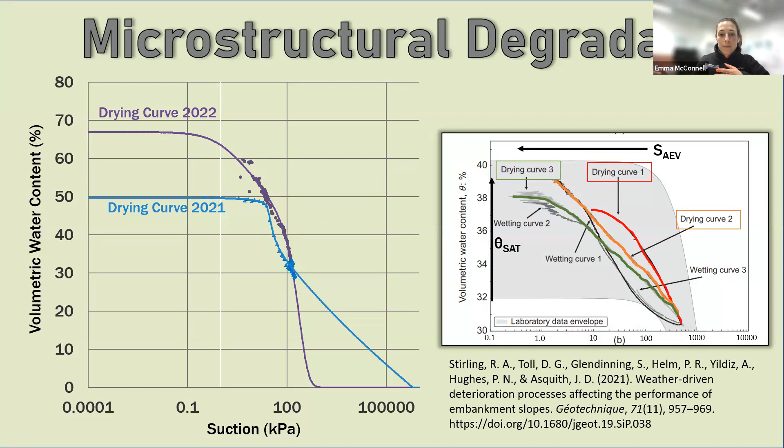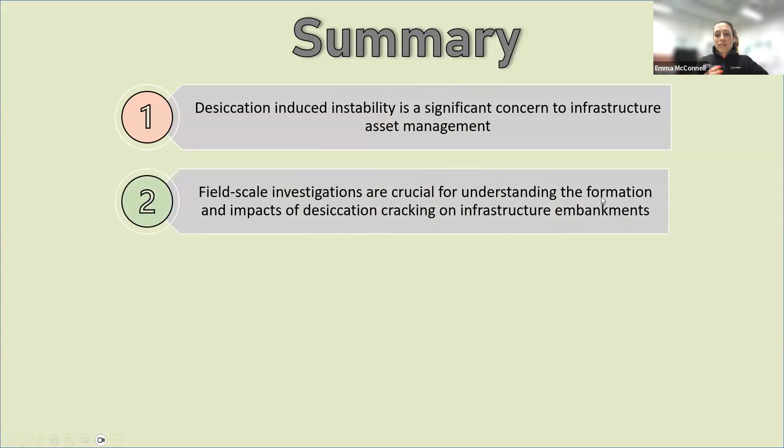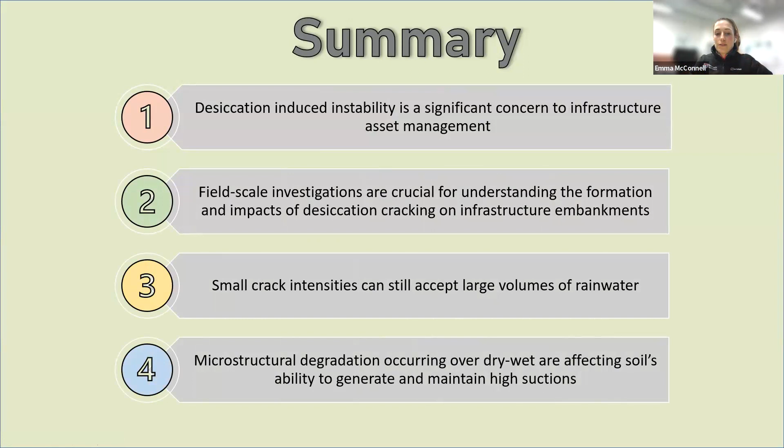So just in summary, desiccation induced instability is a growing concern to our infrastructure asset management. Field scale investigation is crucial for our understanding of how cracks form and how this affects the hydrological profile through the slope. Small crack intensities can still accept a large volume of water, which has implications for the stability of your slope. And microstructural degradation is occurring across these dry-wet cycles, affecting these suctions, which a lot of slopes rely on to remain stable.